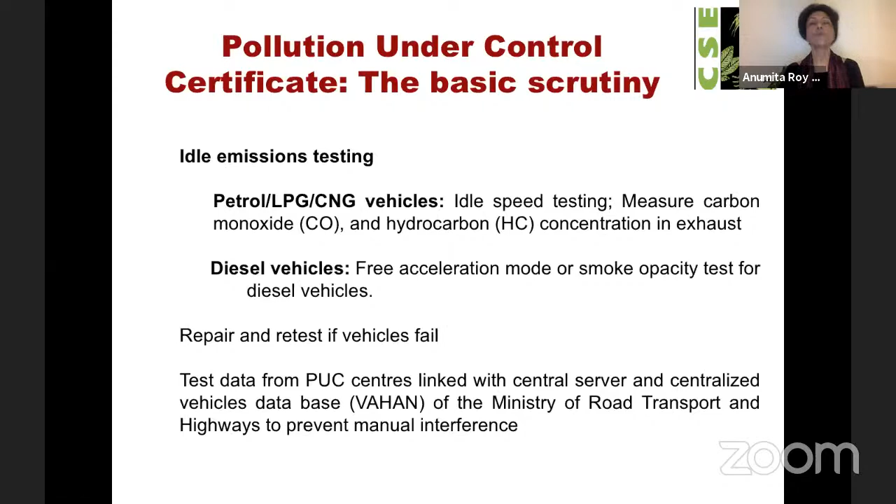This is a very basic test that we do under the PUC program, as all of you know. It's a simple idling emission test where you just measure the concentration of carbon monoxide and hydrocarbon in petrol vehicles, and we do the smoke opacity test in diesel, which is a very poor proxy for particulate matter - a bigger concern in diesel vehicles.

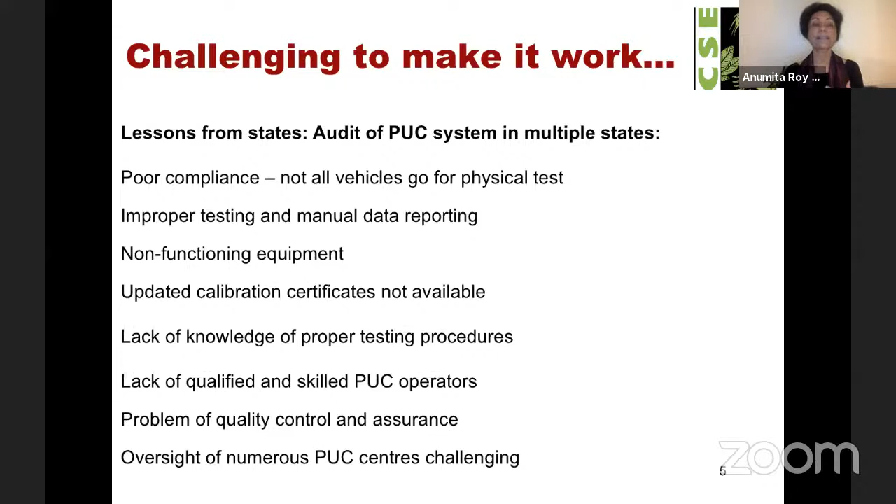But PUC, which is the only strategy for looking at on-road emissions today, we know is plagued with a lot of challenges. Several audits have happened, and we've also been deeply involved with several state governments in auditing the PUC system. That's bringing out the poor level of compliance - all vehicles do not turn up for tests, improper testing, equipment that doesn't function properly, updated calibration certificates not available at PUC centers, lack of qualified and skilled PUC operators, problems of quality control, oversight issues, very poor data recording, very poor failure rate - almost all vehicles pass the test. And the smoke density test for diesel vehicles is absolutely ineffectual.

PUC results, we also understand, as experts tell us, do not correlate well with the vehicle certification data. And increasingly what is coming out is that it is really not suitable anymore - something created for the older generation technology is not suitable for the new generation technologies that are now coming in.

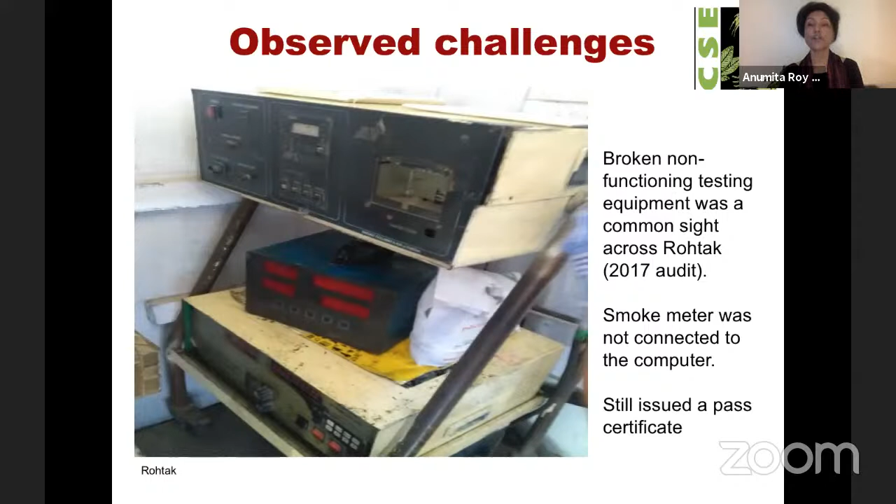If you just want to have some visual images from the different audits that have been carried out in different parts of the NCR, you can even look at the state of the equipment in the PUC. How diesel vehicle testing has remained a challenge, and the proper protocol is not met everywhere.

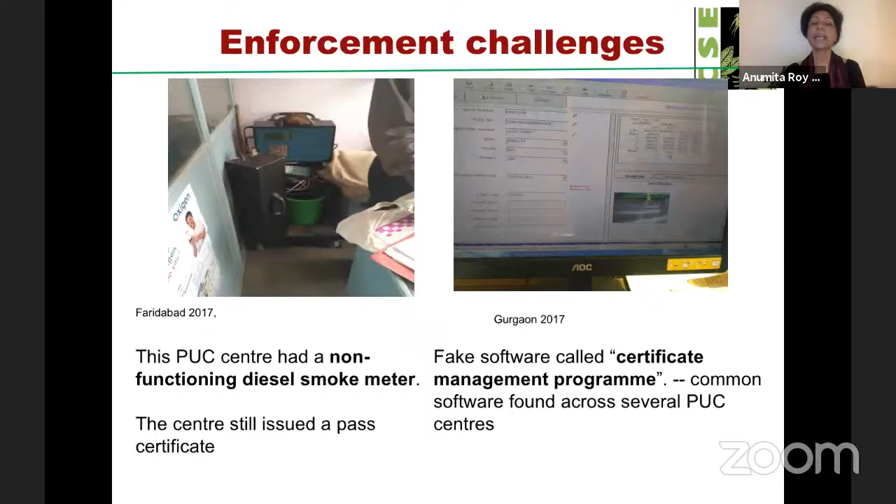There is an enforcement challenge. Even fake software has emerged today. It's easy to get a PUC certificate. Improper testing procedures - all these are big challenges.

Today, as part of enforcement, the police and transport department do check vehicle drivers if they have the PUC certificate. But then they only look at the paper. No one is reading the fine numbers and the fine line in the certificate.

So imagine a certificate for a diesel vehicle where the maximum RPM, that is the speed of the motor, is actually lower than the idle RPM. The number is there in the certificate, but we have not created the knowledge and capacity in the enforcement agency who can spot it and catch it.

Also, now as we are moving towards BS6 and other technologies, we are finding that perhaps there are also issues with sensitivity of the instruments. So for the BS6 vehicles, on some parameters, you're actually getting zero values. Clearly, a lot of things are not okay and not adequate anymore.

More PUC reforms have followed very recently in June 2021 to make it more robust, more enforceable. That's where most of the transport departments are moving towards - uniform PUC certification format, linking PUC database with national register, and the concept of a rejection slip if you don't pass, being introduced for the first time.

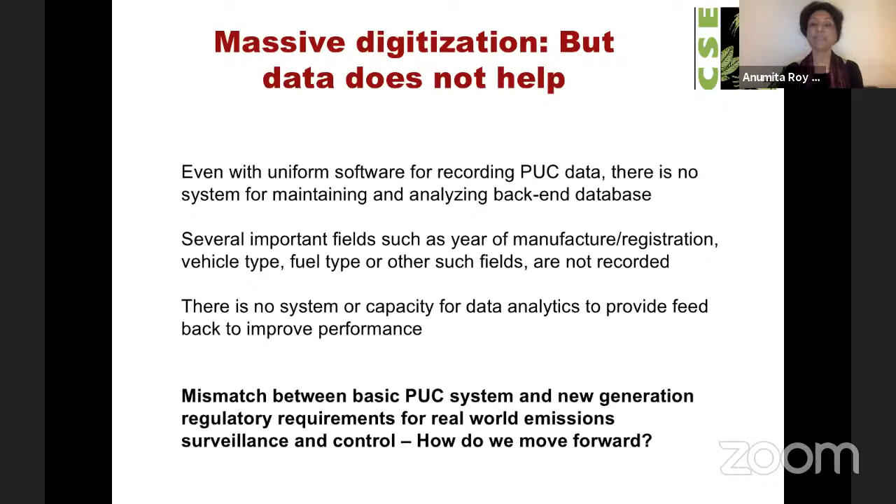Some steps have been taken in India, and ARAI is here very deeply involved with setting up these centralized I&C centers in different parts of the country. These are automated, more advanced centers for testing fitness in commercial vehicles.

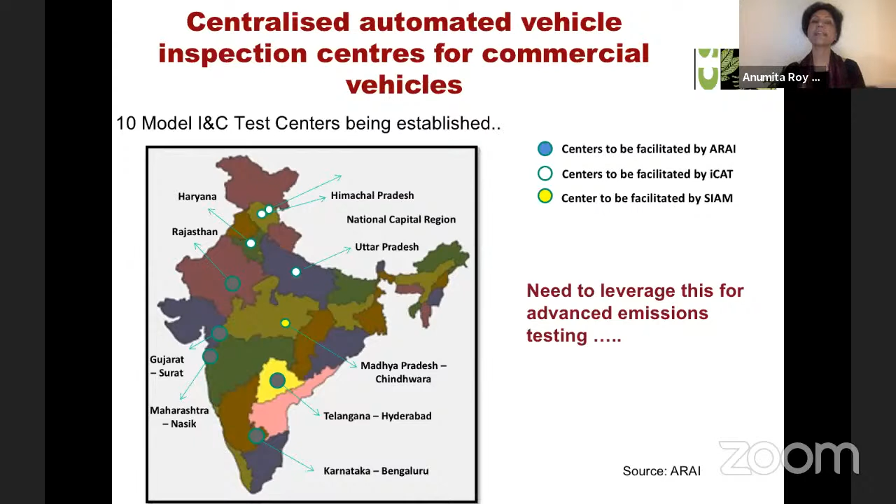Now we need to consider how this can be leveraged so that more advanced emission testing systems can also be linked with this investment. So looking at it from that perspective, our question today is how do we meet the next generation challenge, and how do we keep our vehicles low emitting during their useful life on the road. That is the fundamental question we are raising.

We have a global panel today, and what we really want to learn from them - everyone, even in India, all of us have heard about the Volkswagen scandal, we have heard about Dieselgate. That had gripped the world. And I'm glad today Tim from ICCT is here, because it was your testing, the ICCT testing of real world emissions, that had led to the expose of Dieselgate and the Volkswagen scandal.

But then what is important for us to understand is that after Dieselgate, there was a strong regulatory response across all major global markets, and a lot of regulatory reforms came about, mainly focusing on real-world emissions monitoring and control, different methods of doing it, and improving the certification system at the same time. That's what we would really like to understand from you.

Now, in India, has anything happened beyond PUC? As you can see, we are now beginning to take those small steps. OBD has already been introduced in Indian vehicles. The first step taken for PUC is the notification saying that PUC centers need to look for the malfunctioning light on the dashboard, and if the light is on, the vehicle should be returned for repair and brought back for retest. This is what we have started doing.

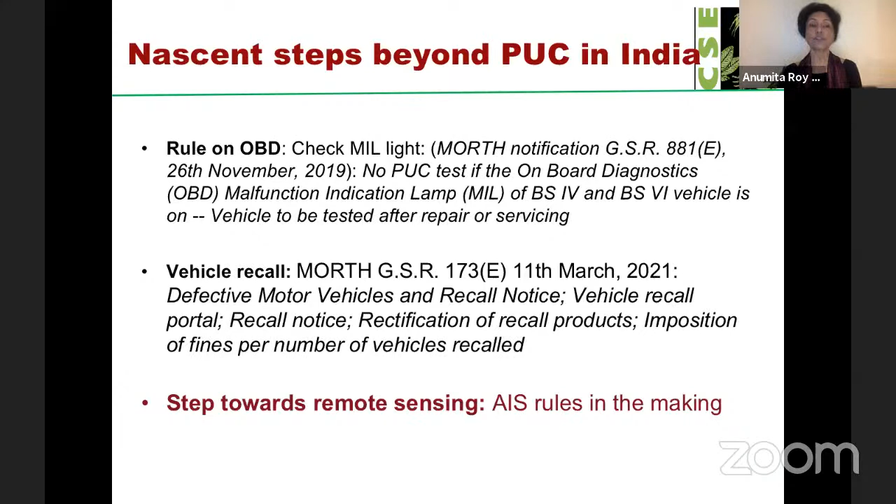India has also adopted the vehicle recall program. But what is more exciting, and the reason why we are discussing this today, is the step towards remote sensing. Let me tell you that the opportunity in India today is that under the National Clean Air Program, 122 cities are implementing clean air action plans.

States where we are, we know that they have already included remote sensing as part of their clean air action plan. West Bengal really takes the lead. Kolkata has already implemented it, but if you look at the other non-attainment cities in West Bengal—Asansol, Barrackpore, Durgapur, Haldia, and Raniganj—all of them have included remote sensing in their plan.

They have actually mentioned that the current program in Kolkata, that is what will be the learning curve for them. Similarly, Mumbai Clean Air Action Plan has also done this, and now very recently their Committee on Transport has taken this on board for further detailing. Odisha, Bhubaneswar, they have included this, and in Delhi, as you all know, the Supreme Court has already mandated implementation of the remote sensing program.

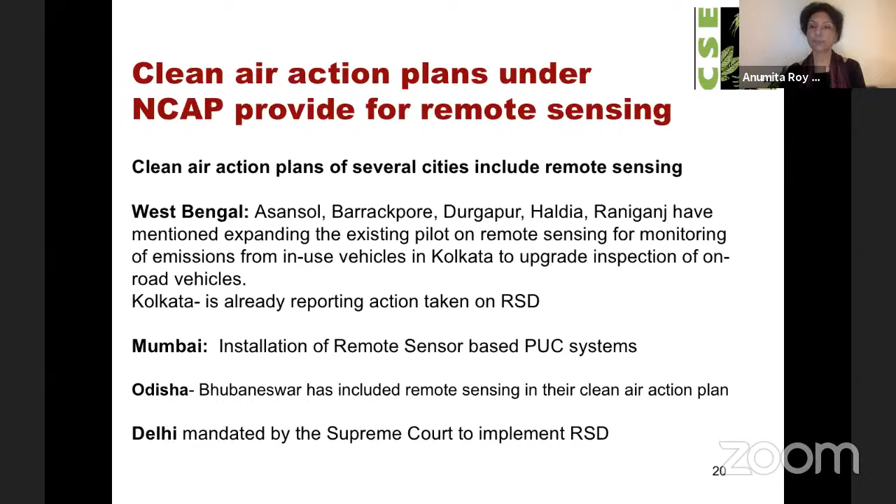To understand what is happening in India, the first generation remote sensing had actually started in 2004-05, when ARAI was looking at ways of further developing the I&M program in India. Small pilots had happened in Pune and Delhi, but then there were many challenges at that point of time. The technology was not mature, and there were challenges in terms of measuring emissions from 2 and 3-wheelers.

If you look at the data available, out of the total measurements in that pilot scheme, 92% of total results were for the light duty vehicles, and 78% for the buses and trucks were found valid. But for 2-wheelers, it was only 28%. It had happened then, but then it was discontinued. Nothing came out of it after that. There was a lull and a discontinuity. Nothing happened. The whole issue again got revived when in Delhi a few years ago there was a strong demand for improving the on-road emissions monitoring.

That's when the EPCA, which was at that point of time the committee recommending to the Supreme Court, took this issue up with the court, and there was very strong support from the Supreme Court. If you look at these 3 critical directives from the Supreme Court at that point of time, Mr. Sinha, you will be happy to know that in the Supreme Court directive of May 10, 2018, the court actually observed...

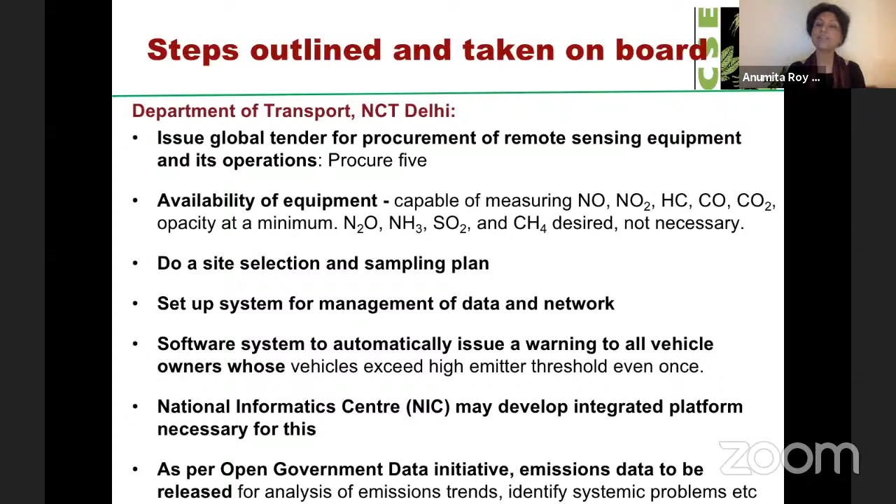For the Department of Transport, they were asked to implement and do the global tender, assess the availability of equipment capable of monitoring all these parameters, do site selection, create data networks, software - all the program detailing was asked to be done. But this could not be taken forward because it awaited action from the central ministry first. So clearly, this is the mandate today.

But the good news today is that the Ministry of Road Transport and Highways has now framed the AIS rules, and this notification is there. I'm not reading this out, but it has defined the full scope of that program. The question is, how do we take this forward now for implementation?

Today, when we are looking at India, the only city that is already implementing - and no one knows this - Kolkata has been implementing this for more than 10 years. The directive had come in 2009 from the High Court, and since then this has been going on. I'm not going into the details because we have Mr. Sinha to talk about this.

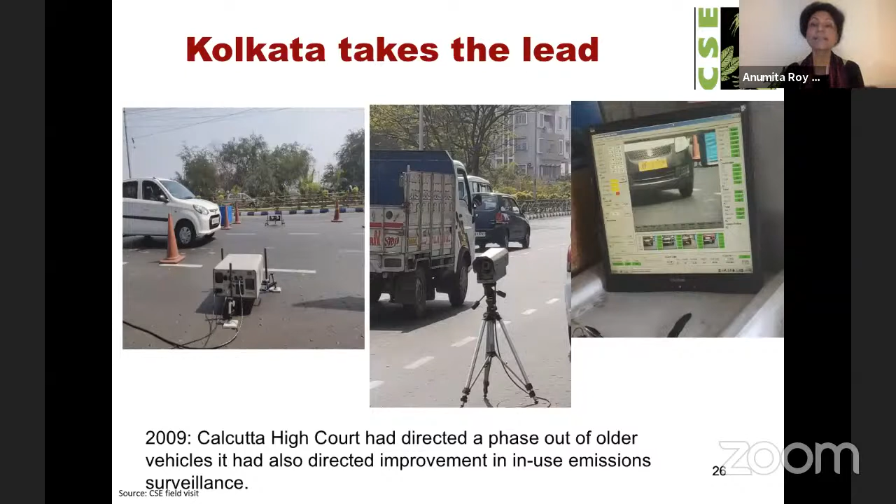But this is the only instance, an example, and a long example that we have in this country where this has been implemented. Finally, when India is going to frame the new program, we have to tap into the global learning curve. That's why this international panel today is so important for us.

As you know, there has been very rapid advancement across all major markets of the world - starting from spotting and chasing visibly polluting vehicles, then taking them for compliance testing for short tests on dynamometer, which Hong Kong kind of started so early. And then you have the small volume testing on dynamometer.

Today, the world is moving towards using portable emission monitors for real world testing as vehicles are being driven on the road, but these are still low volume testing. Where large volume testing is possible and happening is remote sensing, which allows high volume fleet-wide screening - that's what we'll discuss more today. Linked to that is the whole OBD monitoring and remote OBD monitoring, which Beijing has done.

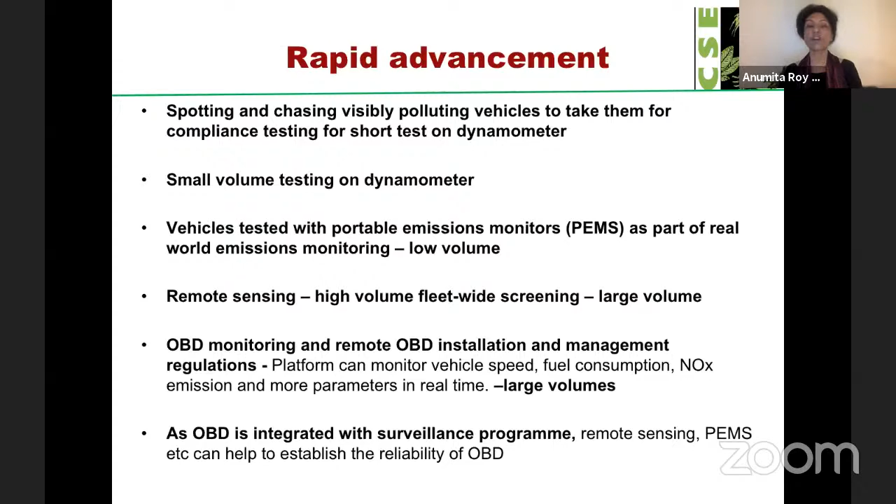So all these are great experiences in front of us. And we understand that with the application of this new technology, this new paradigm shift we are talking about today, this new approach is going to open up new possibilities for us.

We can, and this is what we'll hear from the panel today, do fleet emission monitoring, identify the worst polluters for testing and enforcement. More pollutants and parameters can be brought under scrutiny. This remote sensing measurement is going to be more representative of real world emissions. This will enable surveillance and catching of emission fraud in the real world.

It will assess performance of vehicle technology, which is evolving constantly in response to new mass emission standards, and can also help support implementation of new policy measures. More steps are being taken today to standardize the systems and their application globally - that's what we'll hear very keenly from all our presenters today.

So the final point: based on all this conversation and our understanding of how the new trajectory is evolving, we have to identify the next steps in India. If MORTH rules are here, then how can we implement that, taking it as the basis and guidance and guidelines for the city and standardize the system for implementation?

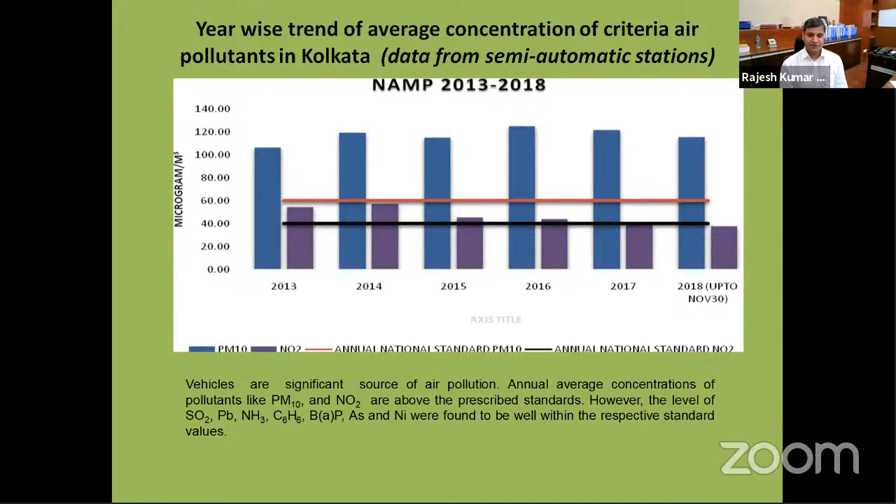This is the year-wise trend of monitoring of pollution in Kolkata. Various pollutants have been measured, this is taken from the Environment Department. We have just shown PM10 and NO2 from 2013-14. It is almost constant; in fact PM10 has increased, but NO2 has decreased from the earlier levels. This is how it fluctuates, starting at a higher level in the months of winter, goes down during the monsoon, and again climbs back to the higher level.

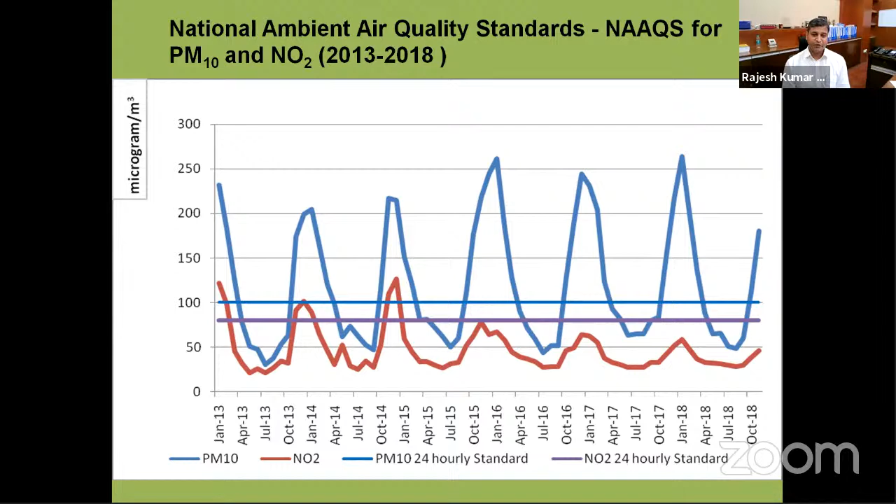Use of RSD in Kolkata started in 2009, when we first purchased the device that year. The device is operated by a private party selected by us, who maintains and operates it on our behalf. The device checks emissions without stopping the vehicle on the road and records pollutant levels of carbon monoxide, hydrocarbons, NOx, and smoke. It also takes a photograph of the vehicle with a high-speed camera, where the registration plate of the vehicle is captured.

The capacity of the device is that it can detect pollution from about 3,000 vehicles in an hour, working in broad daylight. It takes about 50 readings of pollution levels from moving vehicles, from one vehicle in less than a second, and measures from all types of vehicles - petrol, diesel, CNG, or LPG. The accuracy and consistency are very good. We regularly calibrate it; there is a standard solution of various gases used to calibrate every 2 to 3 months. The license plate number is captured and the tailpipe emission is captured.

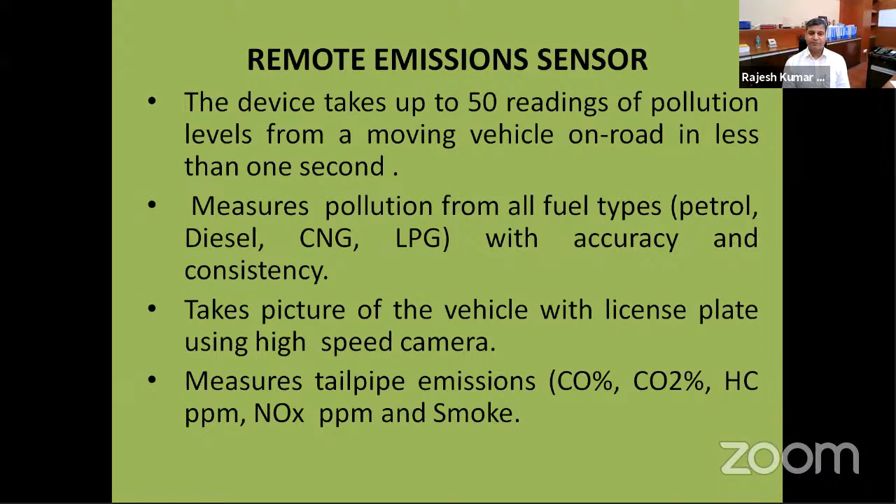I can show you how it looks. See, this is the instrument, this is the camera. The vehicle is moving in line from here, and this is automatically captured. Once the vehicle is captured like this, you can see the speed, acceleration, the CO level, CO2 level, hydrocarbon, NOx - everything is captured with the time and date of the vehicle and the registration number.

After this, we issue a show cause notice to the offending vehicle in a format where we also give the vehicle photograph and the emission which has been recorded by us, and ask them to show cause as to why they should not be penalized. They are asked to come to us within 7 days with the corrected emission levels to our RTO office. If they come within 7 days with corrected emission levels, well and good.

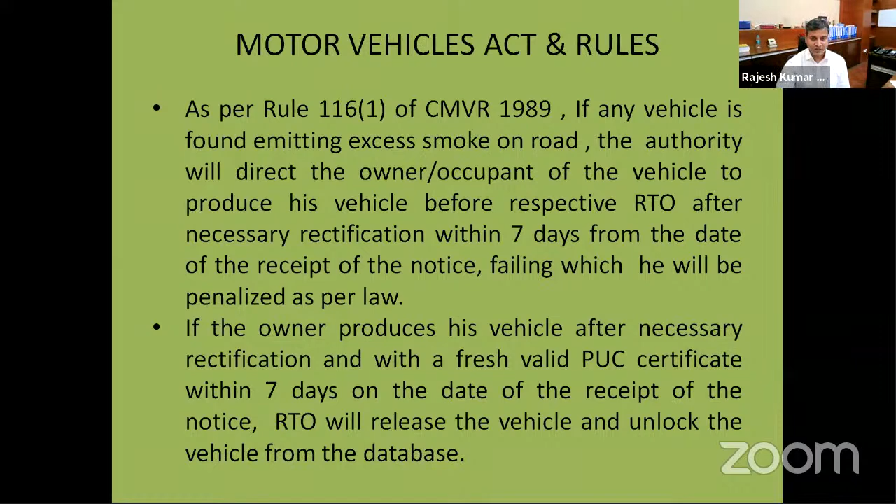If they don't comply, then we fine them as per the MV rules. It is 1,000 rupees for the first violation, and in second subsequent offense, the penalty is 2,000 rupees.

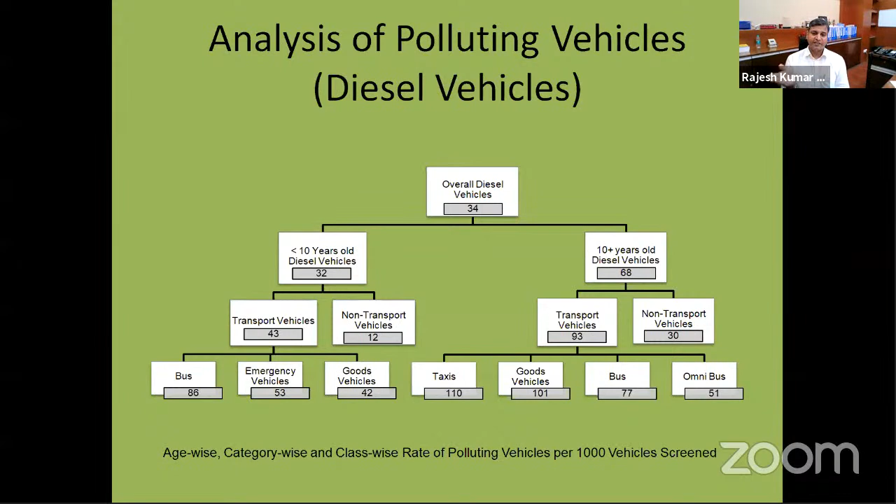Overall diesel vehicles detected on road, 34 out of 1,000 are found to be polluting, of which more than 10-year-old vehicles are 68 and less than 10 years old vehicles are 32 per 1,000 vehicles found to be polluting. There are also divisions between transport, non-transport, goods vehicle, taxi, buses, everything. So this helps us in planning for the future.

So this is how we have been doing, and that's all I have for you to present. Thank you very much.

Thank you so much, Mr. Sinha. It is so encouraging to see hard data from the program, and it kind of convinces that you are already on the right track and why other cities need to follow this. Even though I'm not doing question answers in between, I still cannot resist asking you, what plans do you have to expand this program further, keeping in mind that other cities in West Bengal will also be doing this? So how do you want to further strengthen and take this forward? You started doing the data analysis already, and that is a very powerful tool. So how do you want to further take this forward?

We have been discussing this with our government, and now we have decided that we'll get more of these machines and install them in various cities. Right now we have a plan to introduce at least 2 machines immediately in a build, own and operate mode. We'll not buy the machines ourselves; we'll ask the private party to supply the machine and operate it for us against payment. This is how we are planning to do it, and I believe that by the end of this year, we'll have 2 more machines in place.

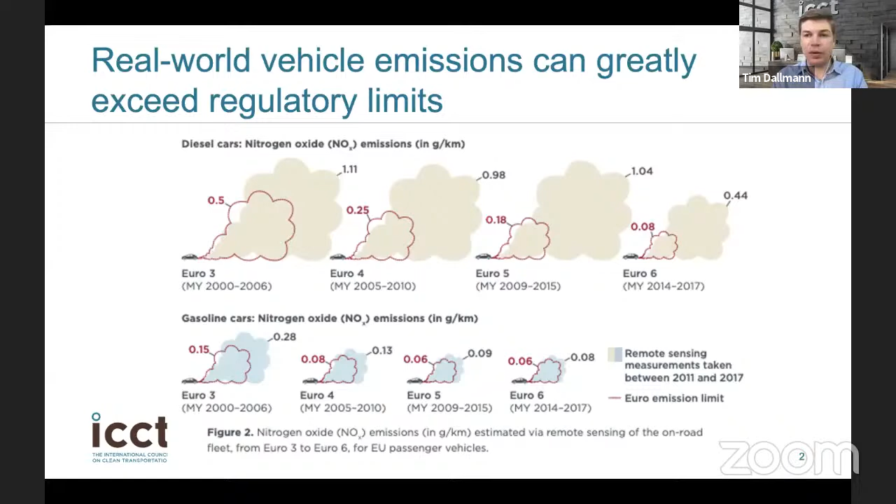Those emissions have detrimental effects on both air quality and human health. So understanding what emissions are in the real world and taking actions to address those are very important points. Some of the topics I'll talk about today cover different ways that regulators, government agencies, and other research organizations can use these methods to provide insight onto real world emissions.

We've already discussed remote sensing technologies. This is one of several different types of methods that can be used to assess real world emissions, and we've already had a good description of the technology itself.

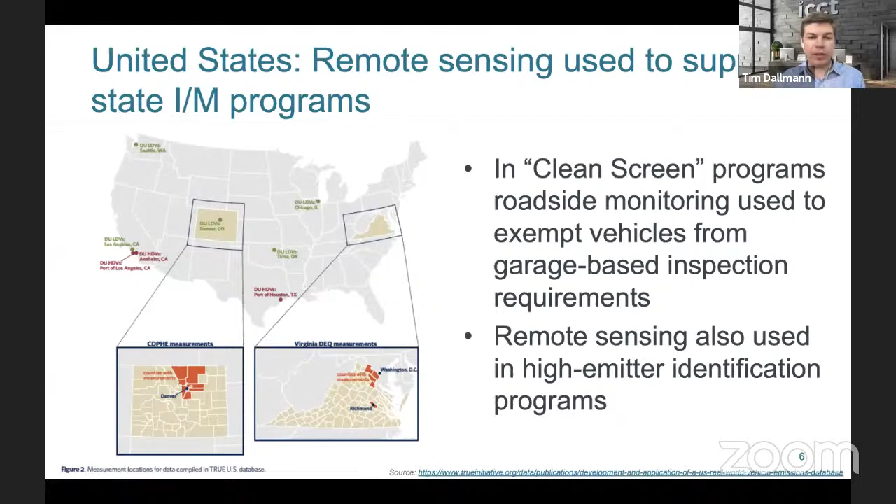A few states also implement high emitter identification programs. One thing I want to highlight is that although these states use remote sensing for a specific purpose, to support inspection and maintenance programs, they're also developing very rich data sets that can be used for other applications. This is an example of work the ICCT did through the TRUE initiative to collect data from states implementing clean screening programs and analyze it to provide a broader picture of fleet emissions in the United States.

Remote sensing and roadside monitoring will continue to be used in the United States. California is now discussing the next stage of their heavy duty vehicle inspection and maintenance program, which will rely primarily on OBD but will also include a roadside emissions monitoring network. This will use remote sensing devices set up throughout the state to monitor in-use emissions of heavy duty vehicles and flag instances where emissions are above expected levels. That's in development now, but it's a nice extension of the use of remote sensing in emissions monitoring programs.

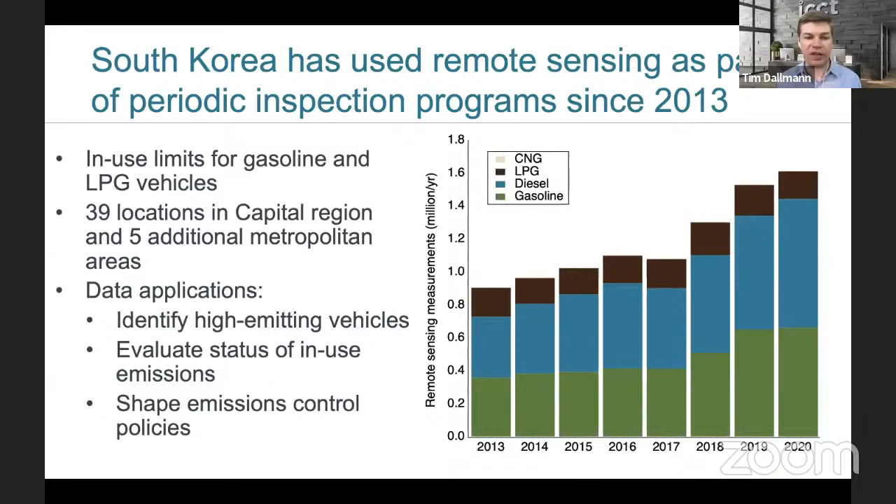Moving on to give a glimpse of South Korea, another country that has been implementing remote sensing to supplement their periodic inspection program. Since around 2013, in-use limits are set for gasoline and LPG vehicles, and as the graph shows, they're collecting between 1 to 2 million measurements each year. The government of South Korea is using the remote sensing measurements primarily to identify high emitting vehicles, but also to evaluate the status of in-use emissions, to develop future actions and policies to address those emissions, and to shape emissions control policies moving forward.

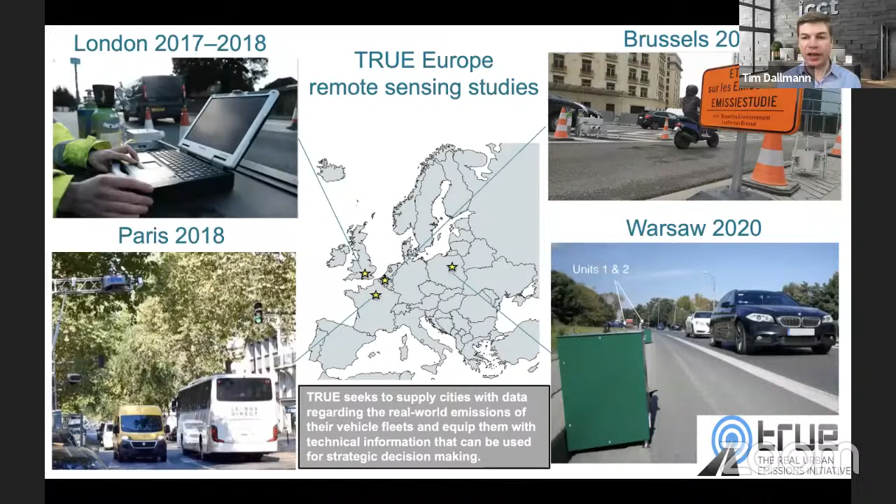In Europe, I wanted to highlight some of the work of the Real Urban Emissions Initiative, a partnership of the ICCT and the FIA Foundation. It was founded in 2017 with the purpose of supplying cities with real world emissions data on their fleets in order to equip them with the knowledge needed to develop new policies and actions to address high emissions in their cities. Through the TRUE initiative, we have led remote sensing testing studies in 4 European cities to date, starting in London and Paris, then last year collecting measurements in Brussels and Warsaw. In each case, these programs are intended to raise awareness about real world emissions in these cities, as well as to provide data to the cities themselves to support actions.

The remote sensing data we're collecting in Europe has also been very effective for other applications, including market surveillance activities, looking at the emissions of specific vehicle families. If enough data is collected, we can start to see differences in the performance of vehicle families, even within a common Euro standard or emissions control standard.

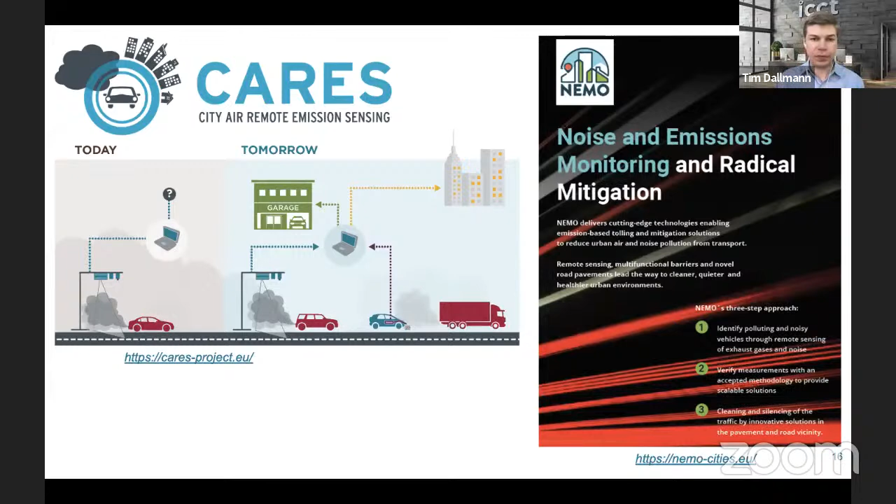Thanks a lot, Tim. This is really a very good overview of what's happening around the world and what we can learn and the scope of application. I'll come back to you because I'm also keeping an eye on the time and we are really running short of time. So now we come back to India again.

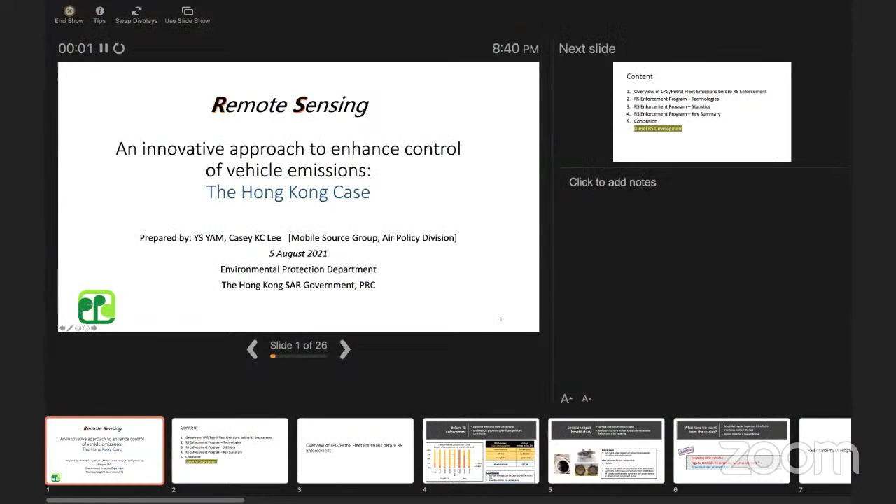Okay, thank you. Hello everybody in India, are you listening to me well? Okay yes, so I'll share my PowerPoint slides. I'm not sure if you can see my PowerPoint. Yes we can see it. I think Dr. Yam, you need to, yeah, thank you. Okay alright.

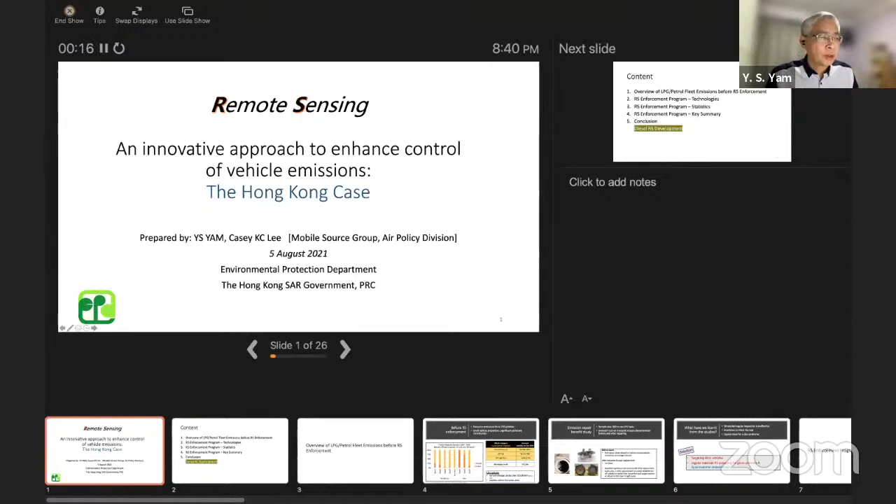My name is Yam, hi everybody in India and in the US. I'm from the Environmental Protection Department of Hong Kong, with the Mobile Source Group of the Air Policy Division. Today I'm going to talk shortly about the remote sensing enforcement program we've had in place since 2014. I'll cover the basic facts, baseline information, the technology we use, and some figures generated from the program, and if time allows, some recent developments in diesel remote sensing.

I'm sorry to interrupt, can you please put your slide on slideshow mode please?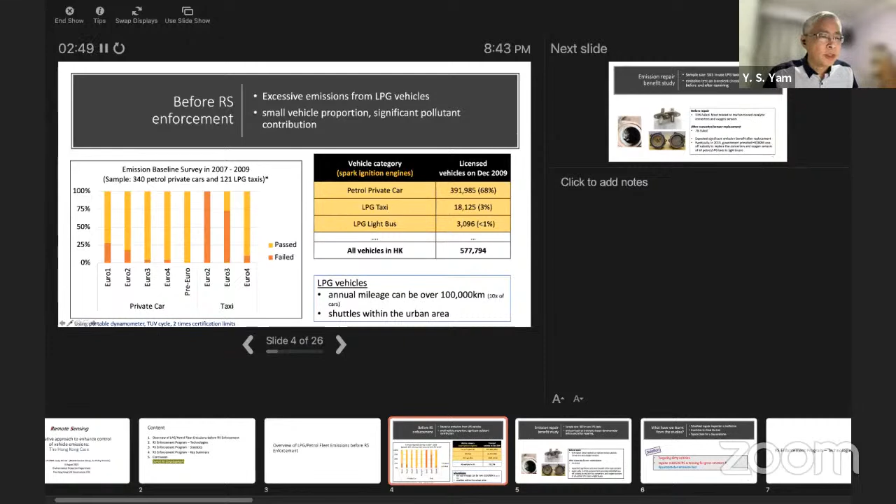So with those failing vehicles, we did an emission repair benefit study, and we sampled about 560 taxis from the fleet, and analyzed the causes of their problem. We did the emission tests on a transient dynamometer before and after the repair.

Before repair, 91% of those vehicle samples failed, mostly related to catalytic converter and oxygen sensors. You can see there was severe damage in the converters and malfunctioning oxygen sensors. After the repair, which was basically replacing these two items, testing showed the fleet only had 7% failure. That's a drastic decrease after the replacement of the converter. So we expect there will be a significant emission benefit after the replacement.

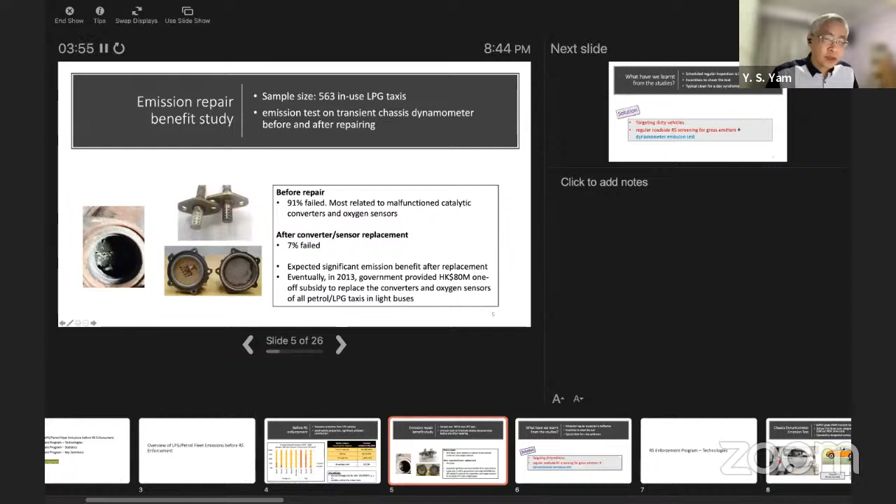Eventually in 2013, the government provided a one-off subsidy for all the taxis and light buses to replace their converters and oxygen sensors, and that cost about 80 million Hong Kong dollars.

So the lesson we learned from this study is that all these taxis and light buses need to go through scheduled regular annual inspection. Obviously the mechanism isn't effective at all, because there's a big incentive for them to cheat just to pass the test on that day. That's a typical 'clean for a day' syndrome that we've heard about for so many years, and it's still happening. That's why we decided there should be a targeted dirty vehicle program.

And we decided to use remote sensing for gross emitter screening. Those found to be gross emitting will need to go through dynamometer testing.

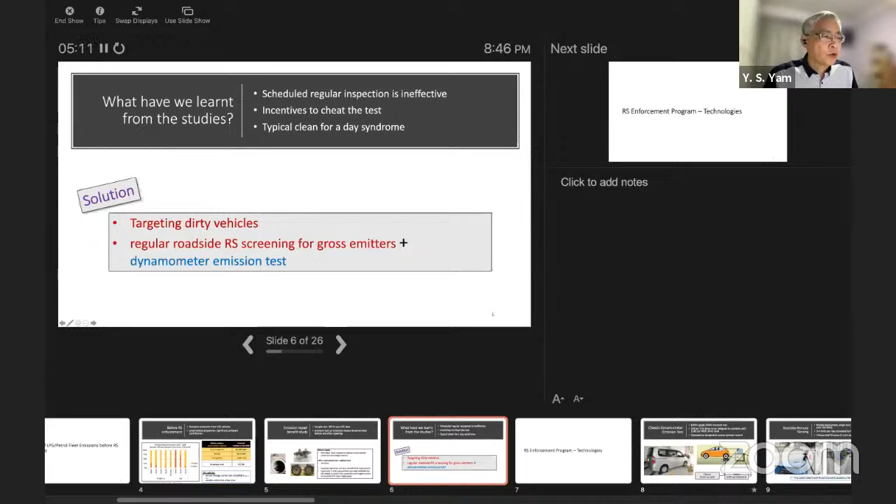Okay, so basically the technology for the dynamometer is we use a BAR97 grade VMAS transient test. The test cycle we selected is a drive cycle, a 200-second drive cycle, designed to correlate with the NEDC drive cycle at that time. We have centers set up with this kind of dynamometer, operated by private sectors, but the centers are designated by the government.

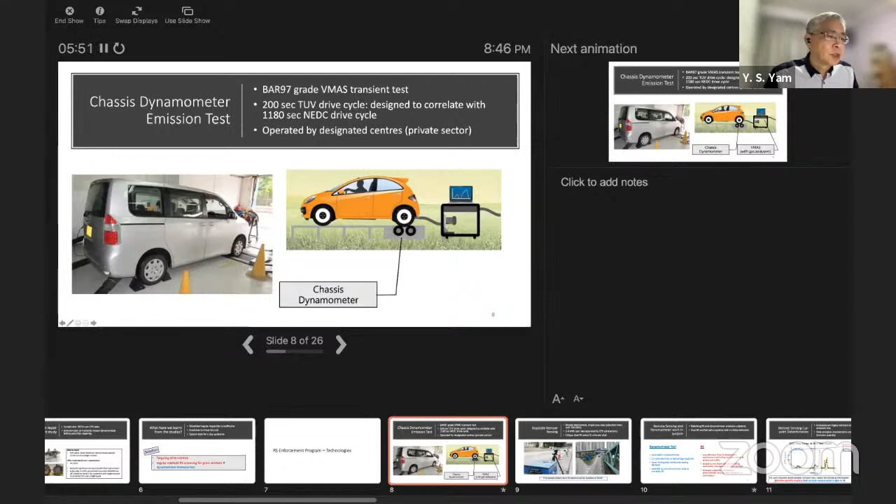We selected to use the transient test in this case, mainly because we found that if you want to correlate the remote sensing technology with the dynamometer test result, you need to use transient testing instead of a steady-state ASM testing.

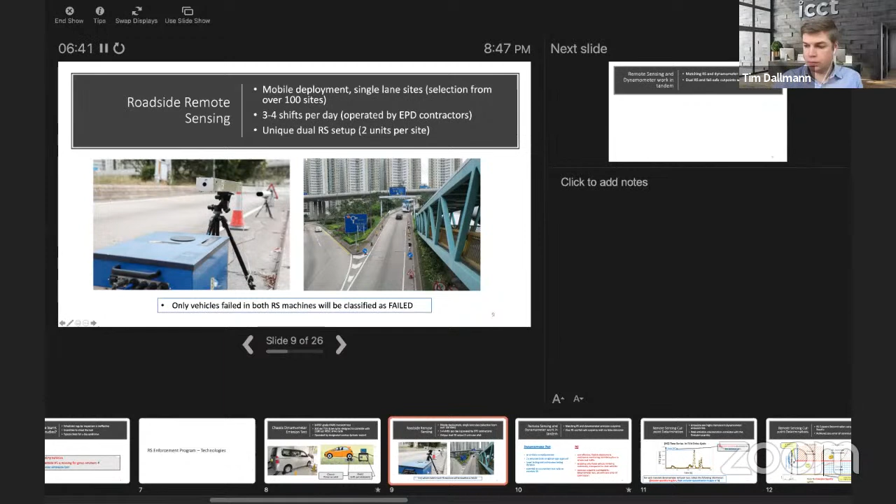This is the remote sensing equipment we're using as of today. We have a mobile deployment setup, so we didn't have any fixed site remote sensing sites - they are selected single lane sites, and we have over 100 sites throughout Hong Kong to select from. Each day we typically do 3 to 4 shifts, operated by our contractors, and they don't operate 9 to 5 - they operate more than 16 hours per day, even in the evening.

We also have a unique dual remote sensing setup - at each site we have 2 units deployed, the first unit and the second unit at the same site. So when we screen the vehicles, only those that fail in both remote sensing machines will be classified as a fail. That means even if one machine says high emitter and the other says otherwise, we wouldn't classify that vehicle as a high emitter.

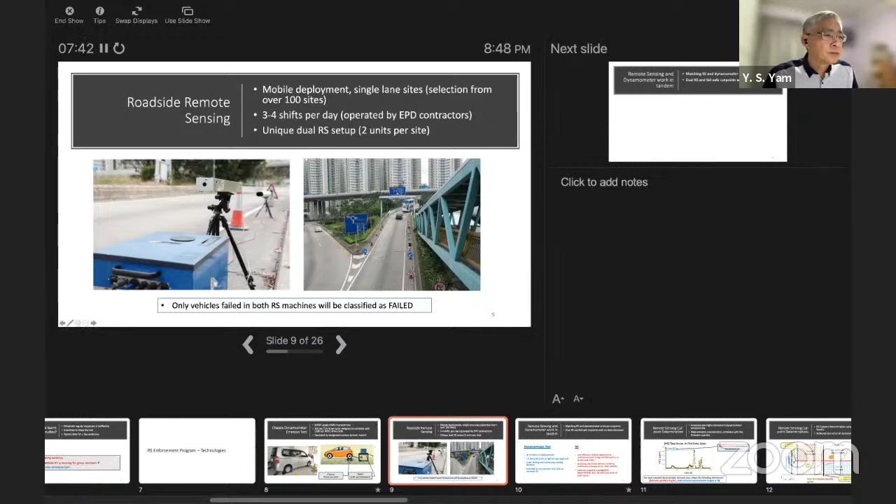The beauty with remote sensing and dynamometer is that they work in tandem, because if you select a correct remote sensing cut point, then you can match quite well with the dynamometer emission test results.

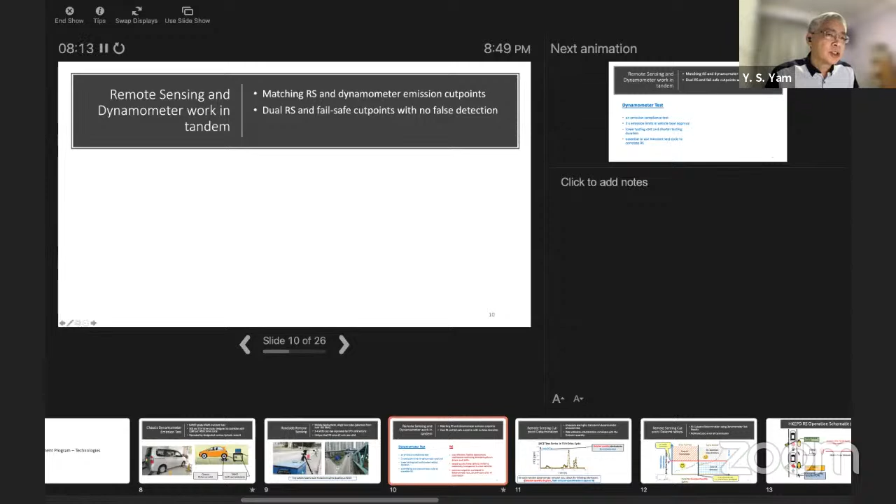Also, the dual remote sensing that we deploy is a fail-safe, and we also set a fail-safe cut point such that when on road, when the remote sensors classify a failure, we ensure there's no false detection or no false failure.

Of course, the benefit of the technology is when you have a dynamometer, it's a more efficient compliance test compared with an idle test or no-load test. We set the emission limit for the dynamometer test at 2 times the vehicle type approval limit.

They are cheaper to test, quicker to test. And also I stress that you must use a transient test cycle to correlate remote sensing.

The benefit of remote sensors have been covered by other speakers. But the key point in our program is that we will set the remote sensing cut point with 0 error of commission. That's the key point for this program.

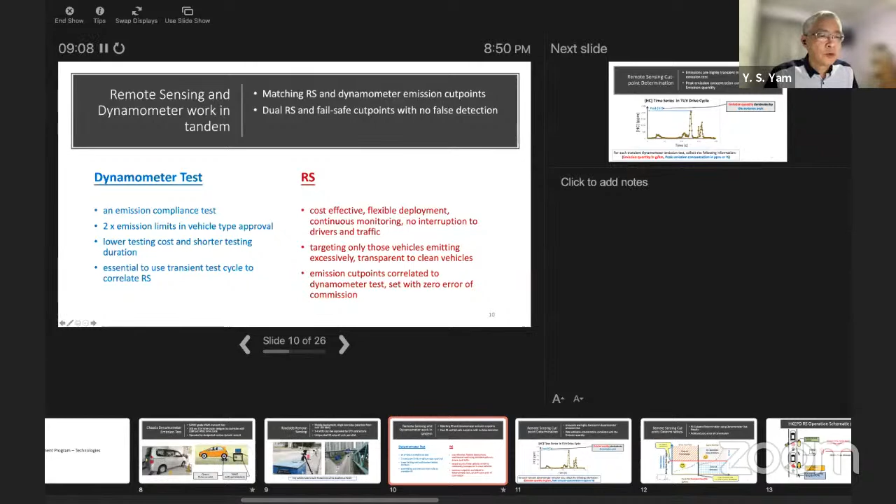So I explained briefly how we determine the remote sensing cut point. The remote sensing cut point is entirely determined by the dynamometer test results. If we set up vehicles on a dynamometer test on a transient test cycle, you find that the emissions are not steady but very transient.

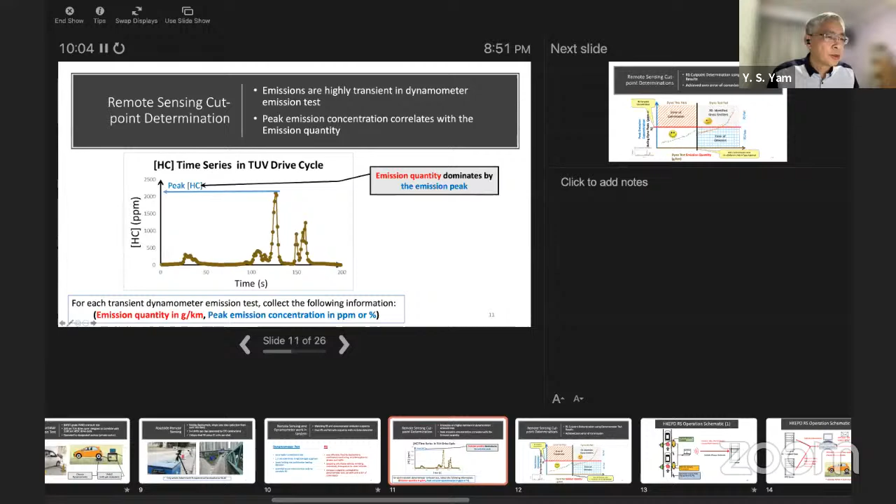Typically a peak or transient emissions would dominate the overall cycle emissions. So in each of the dynamometer tests, we collect information of the peak hydrocarbon - this is the 99th percentile of the whole time series - and also the gram per km of the whole cycle test. With these two pieces of information, then we can set up a chart like this.

And with the data in the server, we match the vehicle information with the Transport Department server and find out the appropriate emission cut point for that particular vehicle number. Because we know the license plate number, then we know what sort of emission standard they should achieve.

We also measure the speed and acceleration of the vehicles to make sure that if the vehicle is under off-cycle condition, then we will drop that data. With the analysis, then we can issue the notice to those vehicles who fail the remote sensors. And I must stress again that the vehicle must fail in both machines.

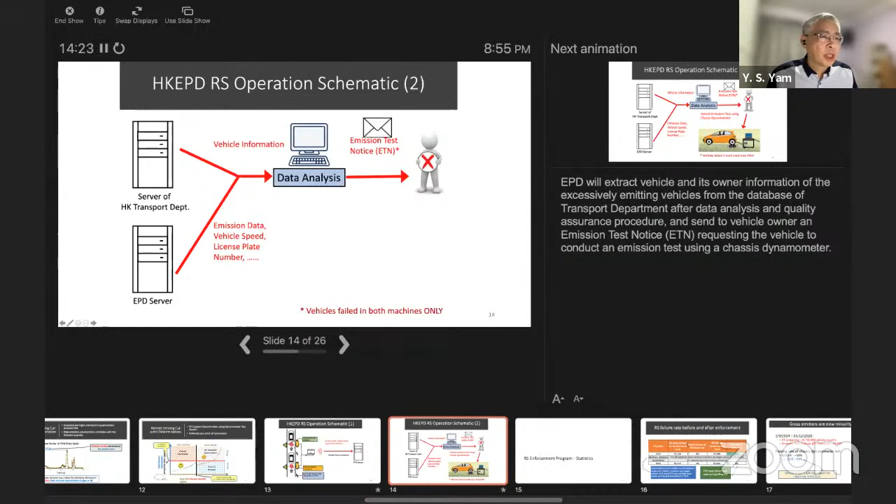For those who only fail in one machine, we do not classify them as failure. With the notice, this is sent to the owner, and they have to bring the vehicle to test in one of the private test centers using the dynamometer test. If they fail to comply with the requirement, either passing the test or bringing the vehicle in, we will inform the Transport Department to cancel the vehicle license. That is the only penalty they will have.

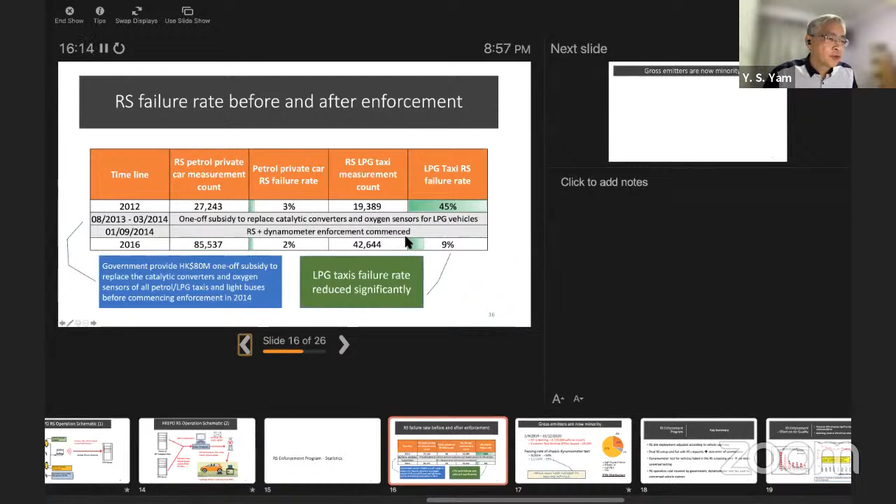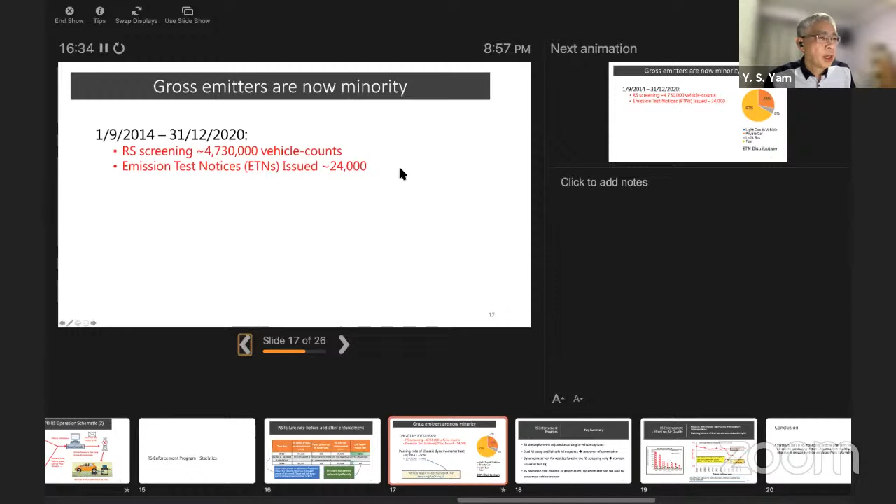This indicates the replacement of the converter was very successful, and the enforcement has kept the vehicles clean all along. From program implementation to the end of last year, we screened a total of about 4.7 million vehicle counts of petrol and LPG vehicles, and issued about 24,000 notices. This is a breakdown of the vehicle fleet - most failures still stay with the taxis. Notice the passing rate: when the program was first implemented in 2014, the passing rate for the dynamometer test was only 50%. But by the end of last year, almost 99% were able to pass the test. That's related to the trade managing to repair the vehicles properly.

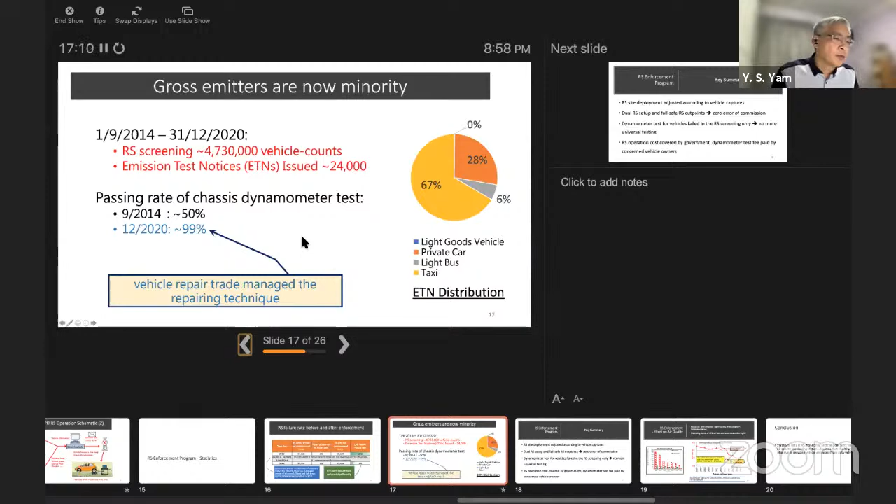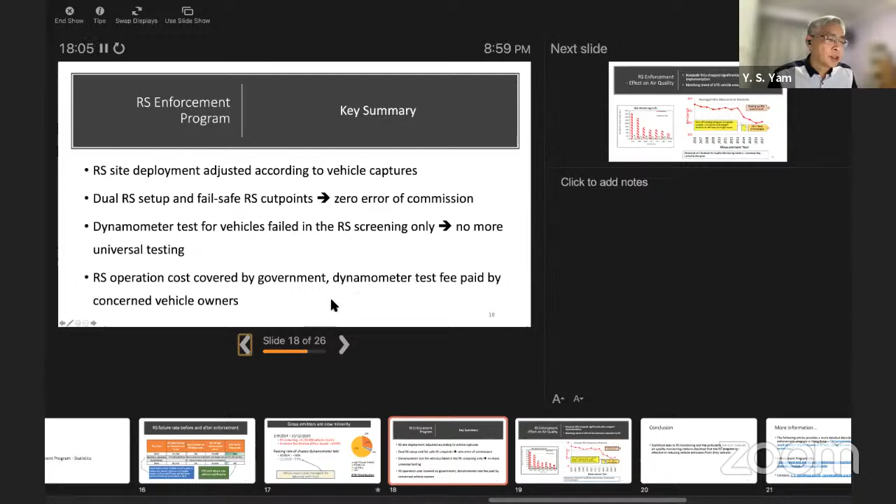The cost for the remote sensor operation is covered by the government, but the dynamometer test fee is paid by the owner, for every test they carry out. To further compare the benefit of the remote sensing program...

On the left side I have a chart of the NOx measurement from remote sensing - most of the failure in our fleet is related to NOx. Before the program was implemented, the average LPG vehicle NOx emission was almost 1,600 ppm. After replacement and enforcement, the LPG NOx emission concentration dropped dramatically. On the right side is the roadside air quality data, and we see a similar drop in the roadside NOx measured by our air quality stations, in sync with the remote sensing program.

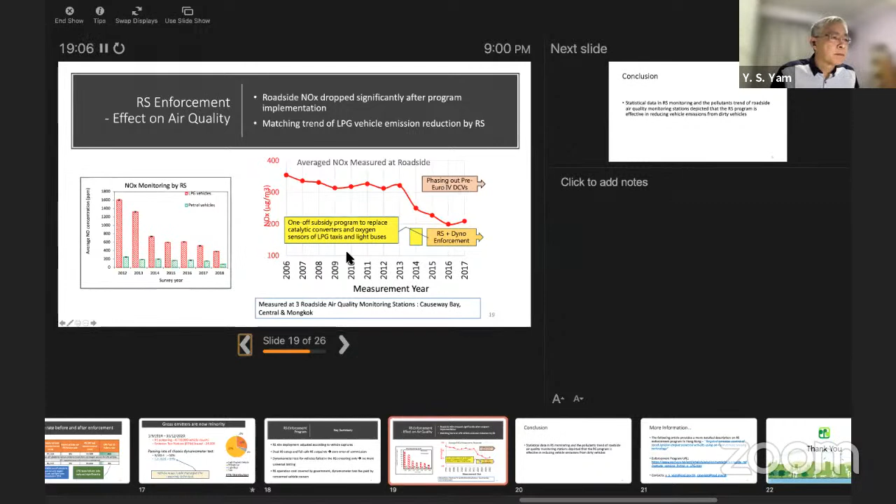And of course, we do have other programs in place as well. From these two data sets, we know that the remote sensing and monitoring results do have a very comparable pollution trend at the roadside, and that it is still effective in reducing vehicle emissions.

If you want more information about this program, we have a paper coming up, so stay tuned and look for that paper. More information about the program is on our website.

That will cover the remote sensing dirty screening. But I want to bring up a couple of slides on the further development of the remote sensing technology - quickly now, since we are running short of time.

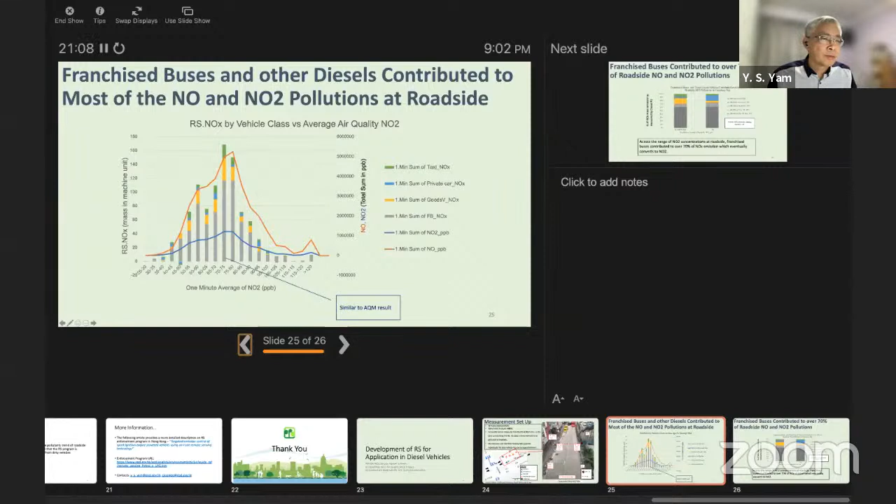You will see that the remote sensing data correlate closely with the air quality sensor results. And if we sum up this chart here, what we attempt to do is see which vehicle classes cause most of the roadside air quality pollution.

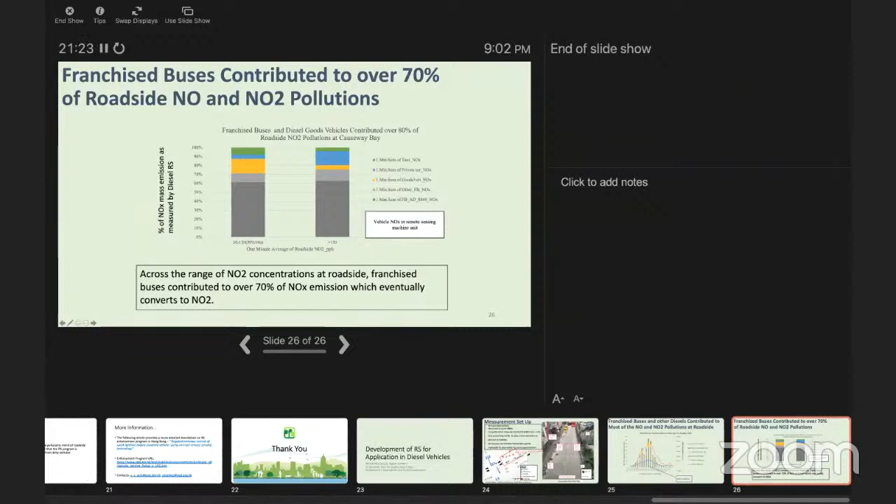Most of the emission will be from our franchised buses. Over 70% of NO2 pollution is caused by diesel buses, and for other diesel vehicles, the pollution is up to 80%. So right now, most of our roadside NO2 pollution is caused by diesel vehicles.

That's the latest one that I want to cover. So thank you very much.

Thank you so much, Mr. Yam. I'm very sorry for rushing you, but in a webinar mode, the time is so tight. It is so impressive to see this very robust program in Hong Kong. What I really like is the hard evidence to prove and demonstrate the impact of the program in terms of improvement in emissions and air quality. It really convinces all of us of the power of this intervention. So thank you very much, Mr. Yam. Look forward to hearing more from you.

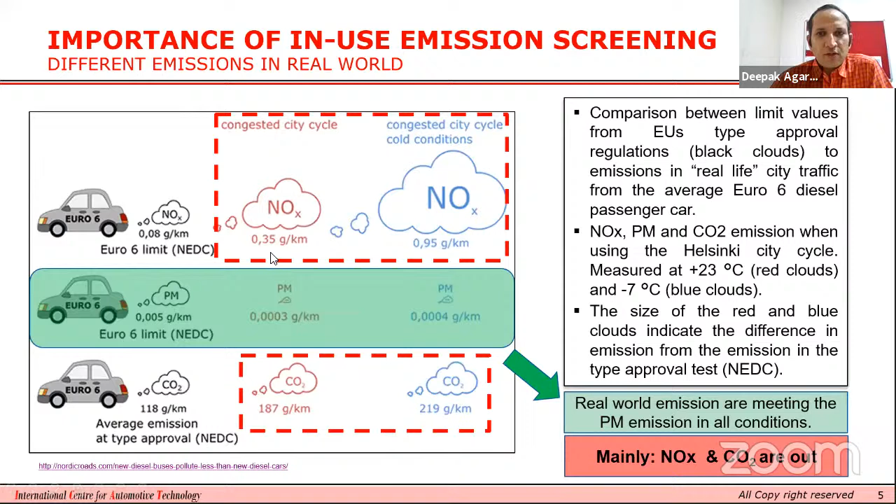This is one of the studies that was conducted in Europe related to figuring out how the real world emissions differ from the regulatory emissions that OEM car companies generally certify. As you can see, the emissions that we get in the city driving cycle at 23 degrees centigrade is 0.35 grams NOx per kilometer.

All this testing has been conducted in the lab, so there is no real world driving. As you can see, in the congested city cycle we get NOx of around 0.35 grams. And in another cycle, conducted at -7 degrees, the NOx obtained is 0.95. So you can clearly see the difference between real world emissions and whatever the OEMs or car companies are certifying their vehicles for.

This is the case for NOx. However, if you look at PM, the emissions are more or less in line with the regulatory requirement, and in fact in some cases much less, which is 0.005 grams per kilometer. This is mainly due to the fact that all Euro 6 vehicles have been fitted with DPF, so there is no possibility that particulate matter can escape unless the DPF is defective, while OEMs have some leeway on how they want to control the NOx. That's why we are getting this big discrepancy between the regulatory requirements and the real world NOx emission.

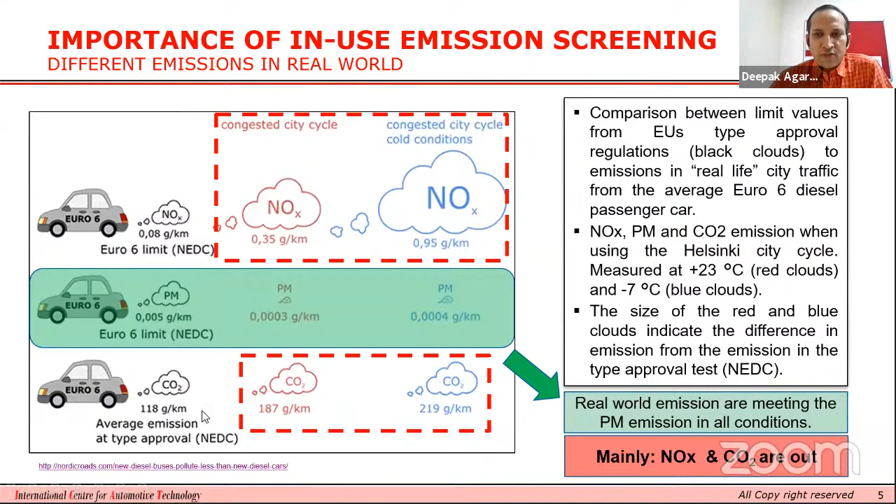In the similar study, the research institution found that whatever emissions are produced by heavy duty vehicles is significantly less than for passenger cars. This is mainly due to the fact that in heavy duty vehicles, during engine tuning or calibration, we are covering a much wider envelope of the engine map as compared to passenger car vehicles, which are certified in the light duty category.

So a little bit about remote sensing. I think this topic has been covered by the previous panelists, so I'll just go through that.

Here you can see the car coming on the road, and here we have set up the RSD device. The RSD device comprises a camera, the speed and acceleration vehicle measurement device, a source module that sends light beams, and a detector module. Whenever the vehicle passes between these two light beams, the RSD comes to know that a vehicle is passing through it.

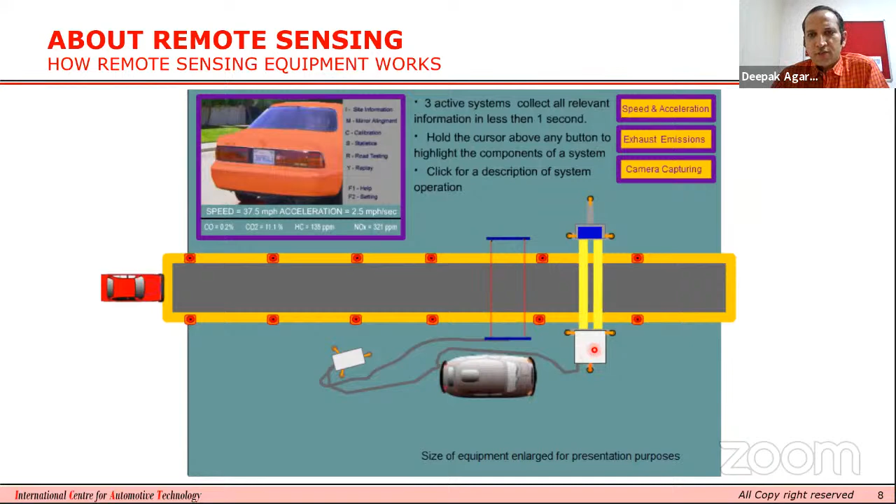Once the vehicle interrupts these light rays, the camera captures the image of the license plate. These two are the emission analyzers - this is the source module and this is the detector module. The source module sends infrared and UV rays, and whenever the exhaust gas passes through the light beam, the light is absorbed by different pollutant gases. Whatever comes out after absorption is detected, and the difference between the source and detected signal figures out how much pollutant the vehicle is emitting.

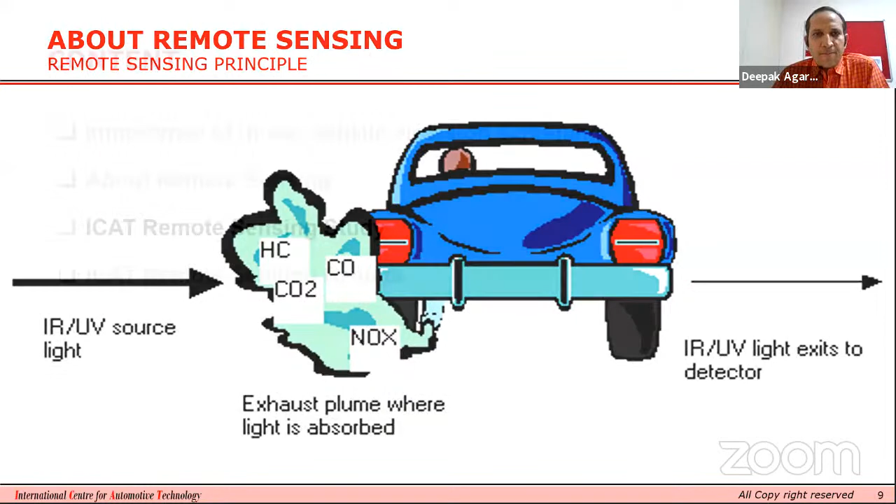A little bit about what we did in ICAT for this project. We divided it into 3 parts. The first was the planning and preparation phase, where we planned the sites where we want to implement the RSD. We have to ensure the RSD device does not hamper traffic, because no government authority will allow us to put the RSD device on the road, so we have to make sure it doesn't hamper traffic movement.

The second consideration was ensuring there is sufficient exhaust coming out from the vehicle so the RSD device can detect the exhaust plume. Usually if drivers know an RSD device is installed, they remove their foot from the pedal and let the vehicle roll through. In that case the RSD will not detect the emissions, so it's important that the driver is either accelerating or has his foot on the pedal, so combustion is happening inside the engine cylinders.

Once we decided on the site, we had to take approval. This is also a big task, because we have to make the authorities understand what we are doing.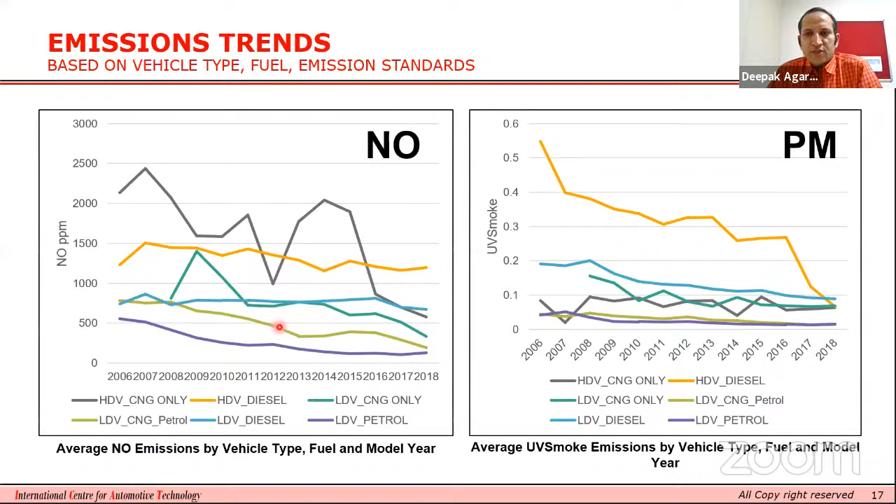So you can see that more or less the good vehicles are not polluting much, but there are only a few vehicles causing the pollution. So we've captured this data here.

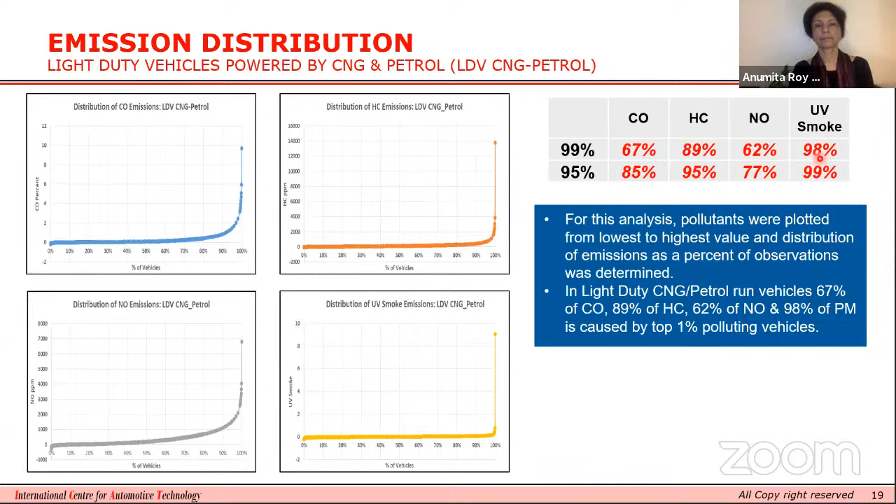So whatever thresholds we need to decide for the RSD, once we implement this program nationwide, we have to come to an understanding of what these limits are, whether we want to capture just 1% of the vehicle fleet or go with 5%. For this project, we've chosen 5% of vehicles should be captured for pullover inspection.

This is something that needs to be put into the AIS document based on the fleet characterization of the entire, let's say, sample fleet that is running in a city.

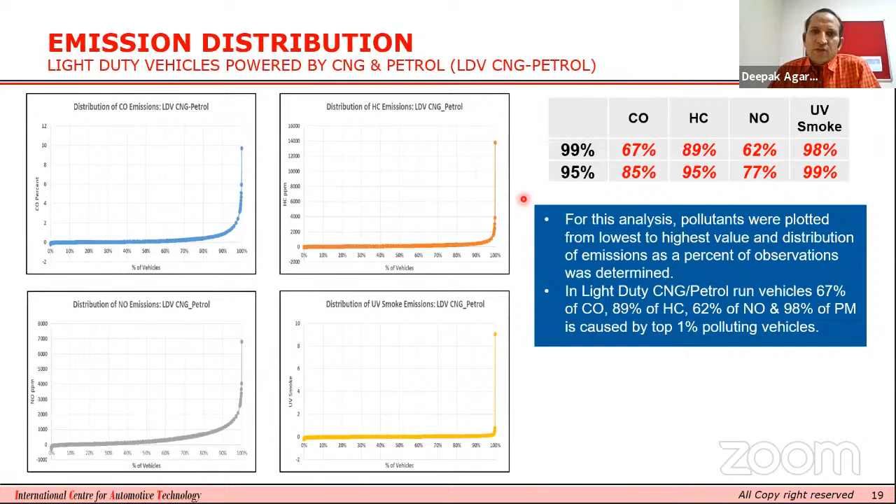I mean, this is so important to have this evidence from our own city. And particularly when we get such deep insight into the fleet profiling that you've done, and this very strong message that by targeting just 1 to 2% of the vehicles, such big emission benefits you can get, that whole worst emitter identification that we're all talking about.

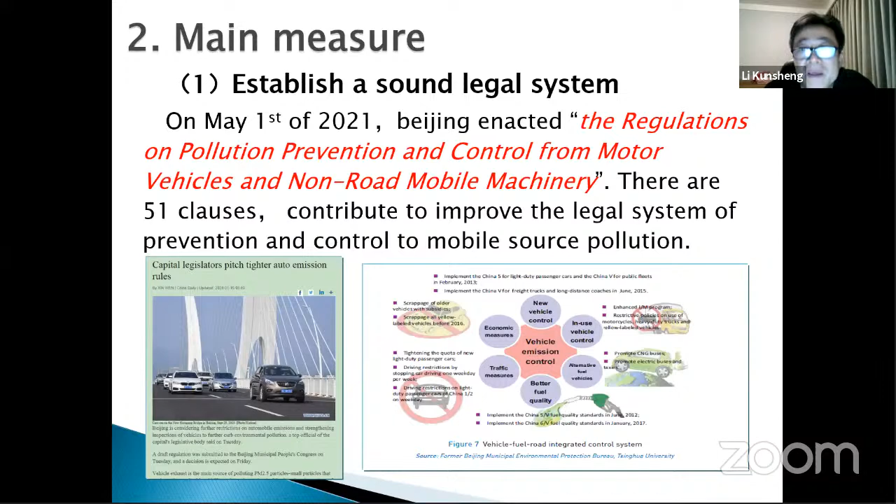And from last year, we made new regulations on pollution prevention and control from motor vehicles and non-road mobile machinery. We have been implementing the National 6 B programs in Beijing in recent years, and at the same time we carry out law enforcement and supervision of new vehicles in order to ensure they meet the emission standards, and a number of enterprises have been punished.

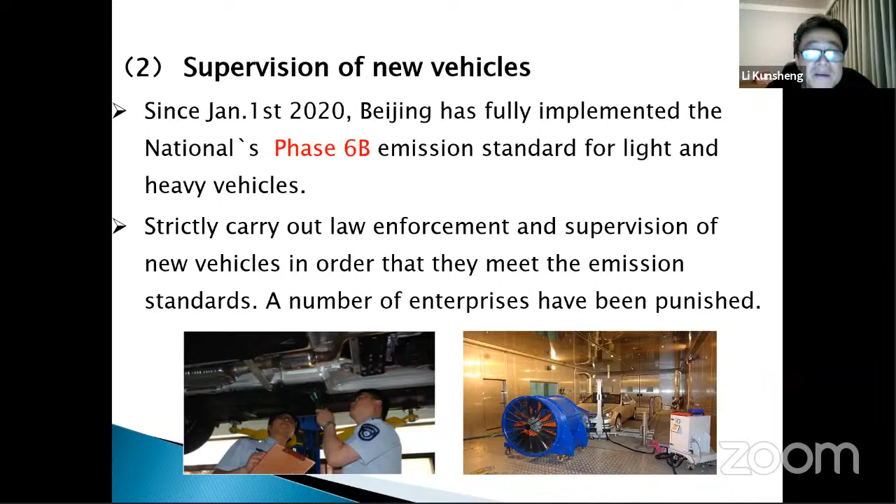I think the most effective way is for vehicle manufacturers to obey the new standards. So in 2020, our bureau coordinated with other provinces and cities, for example Hebei province and Tianjin city, to together implement the new standards, the National 6.

And at the same time, we supervise on-road vehicles and entry inspections, targeting the bigger emitter companies.

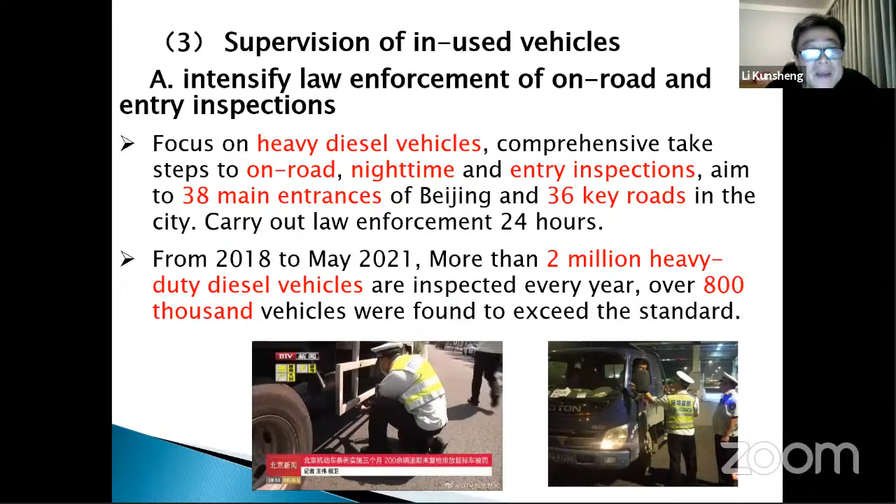For vehicles in use, we also use remote sensors to check the smoke in the Beijing area. We have established more than 100 sets of remote sensor detection points for vehicle emissions, mainly on local roads.

Vehicles found exceeding the standards by remote sensor detection are handed over to the public security traffic management department. In the first half of 2020 alone, nearly 500 vehicles have been punished.

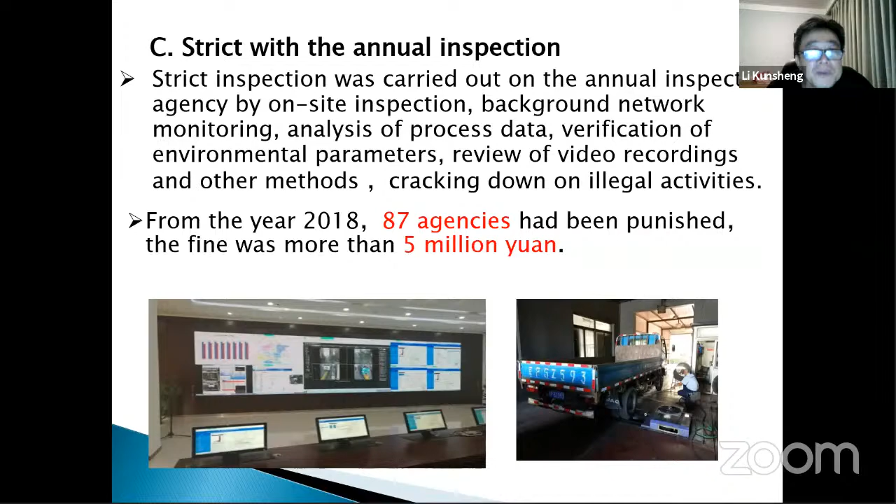And I think one of the most important ways is retiring older vehicles. From the year 2017, we implemented a subsidy policy for eliminating European 3 diesel trucks, and from April of last year, implementing a subsidy to eliminate European 3 gasoline vehicles.

And for traffic restriction of high emission vehicles, we set up a low emission zone in the Beijing downtown area. From the year 2017, we forbade Gasoline 1 and Gasoline 2 European standard vehicles from entering the Fifth Ring of Beijing. And the same year we forbade heavy duty vehicles of European 3 and below from entering the Sixth Ring.

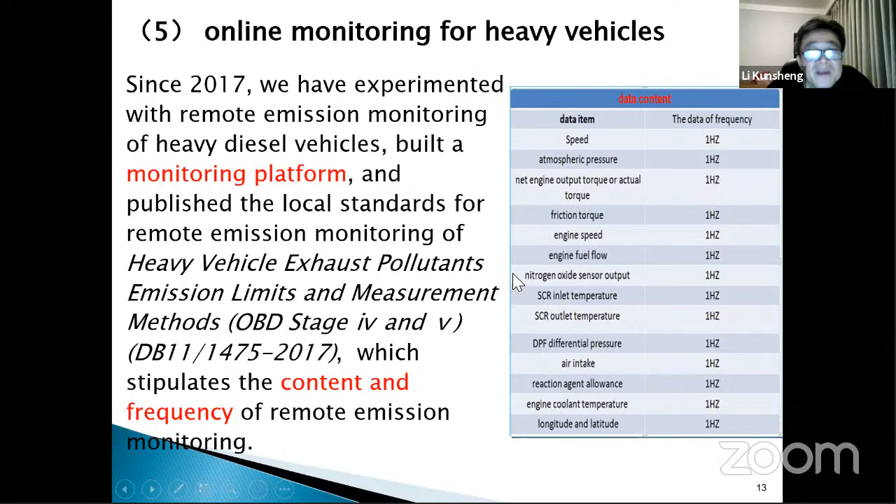After 3 years of hard work, we set up the platform for heavy duty vehicles, mainly focusing on diesel vehicles. In this platform, Beijing realized the function of remote emission monitoring, and the data of NOx emission, OBD alarm, urea level, and other vehicle parameters have been transmitted to the remote emission monitoring platform of the Bureau in real time.

The remote emission monitoring and management onboard terminal installed for heavy duty vehicles can collect data on NOx emission, OBD alarms, urea levels, speed, engine torque, and so on. The monitoring frequency is 1 Hertz.

The remote emission monitoring can reduce the frequency of manual detection of heavy duty vehicles. At the same time, it can detect excessive emission behavior of vehicle pollution in time and reduce pollution emissions. Nowadays, 80,000 heavy duty vehicles have been monitored remotely online.

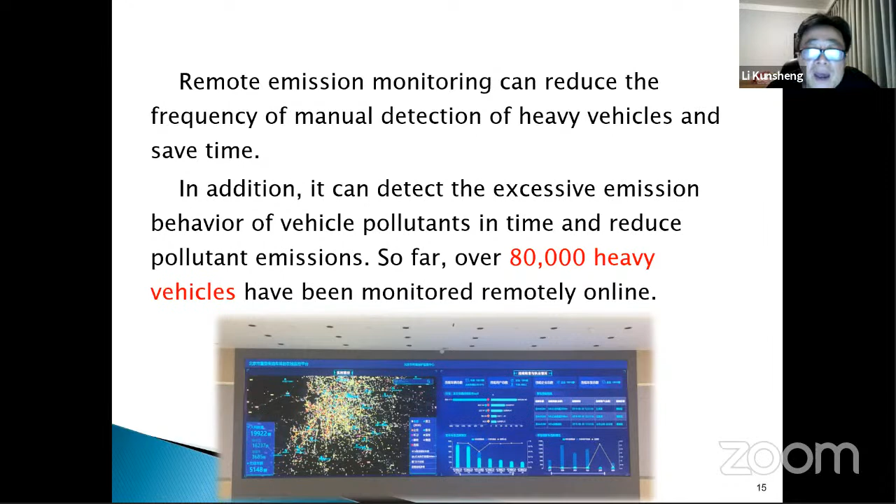We are also implementing the local standard of gas emission for gas stations and oil. This part about fuel recovery and vapor recovery is not the topic for this seminar.

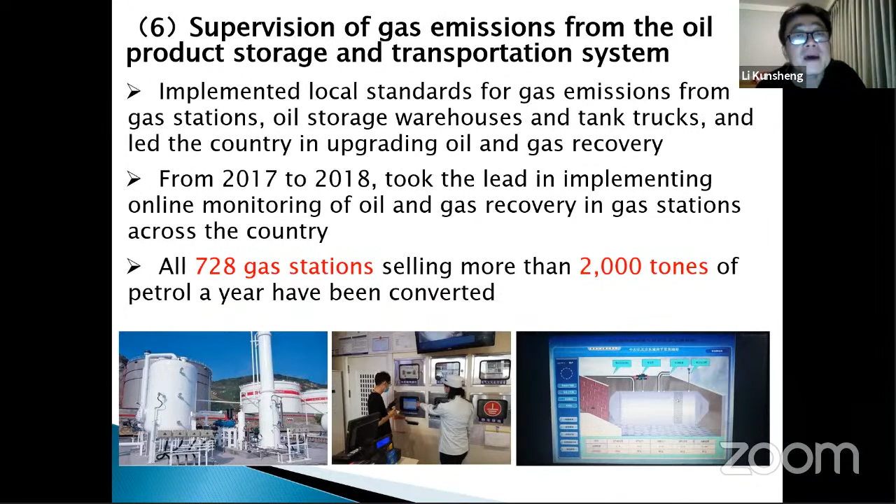So thank you very much.

Okay, thank you so much, Mr. Kunsheng. It's so fascinating to see that you now have the capability to remotely track a vehicle and track its on-road performance in real time. I think that's where the world is moving, and that just shows the potential and the opportunity of this technology.

One approach is to do roadside surveillance and analyze the data, but here you are actually tracking the OBD and the vehicle, tracking so many different parameters remotely and giving feedback. I think this just gives us the idea of how transformative these interventions are going to be in the future.

Now, I understand that we are really very late, but this has also been one discussion where I think we were all very hungry for the knowledge and information that all of you had to share with us. We just did not want to interrupt you, because this is a great opportunity to have all of you together on this platform, listen to you, and understand your information and experience. So I'm glad we've been able to give this the time it requires. Our Q&A and chat boxes are flooded with comments and questions which we cannot take up right now.